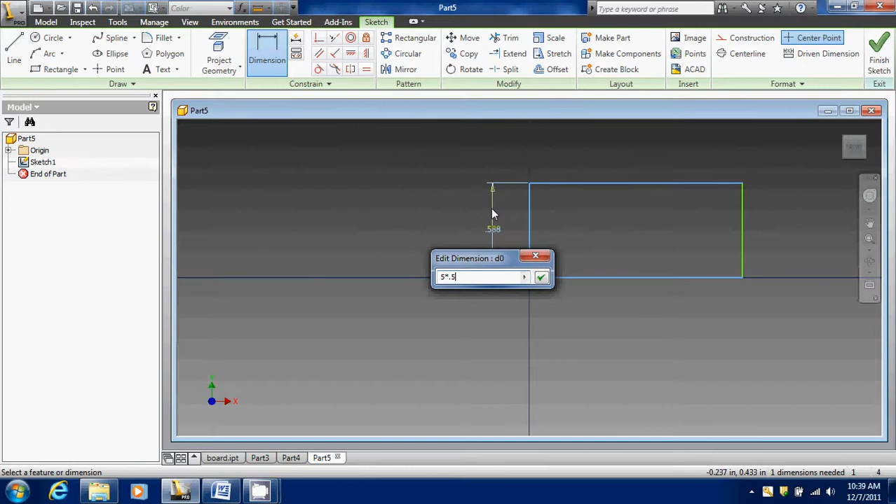New standard IPT, always. Rectangle. Dimension. Height of the rectangle is going to be 5 units, which would be, you could say, 5 times 0.5, and the width of the unit is going to be 8 times 0.5, or 4 inches in this case.

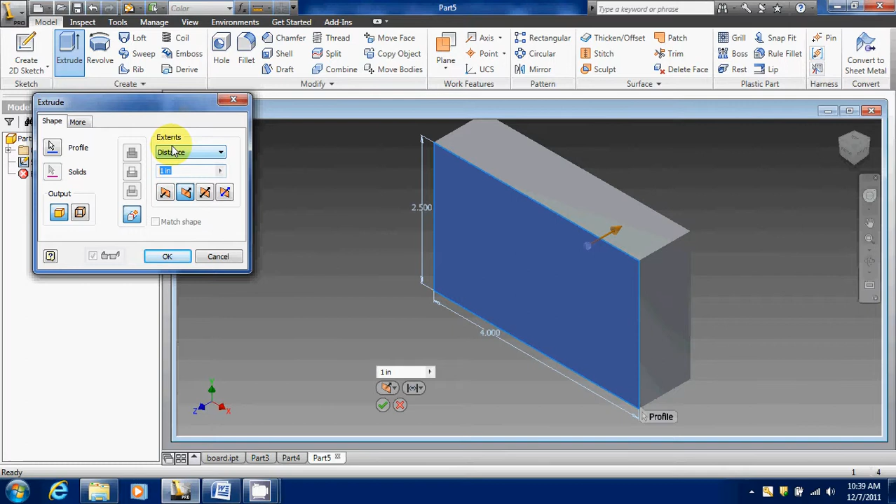Go to the home view, finish sketch, extrude, back. It is 4 units, so that would make it 2 inches deep. And there's our block. First thing we're going to do is create a sketch on the front face. Using line, lock onto a corner, come down anywhere we want, lock onto the other corner.

Looking at this, we can see that this point of this V meets right in the center, I believe. 1, 2, 3, 4 units right there. 1, 2, 3, 4 units right there. And it's 1 unit high. So let's go ahead and dimension that. The distance from this point to that line is going to be 2 inches.

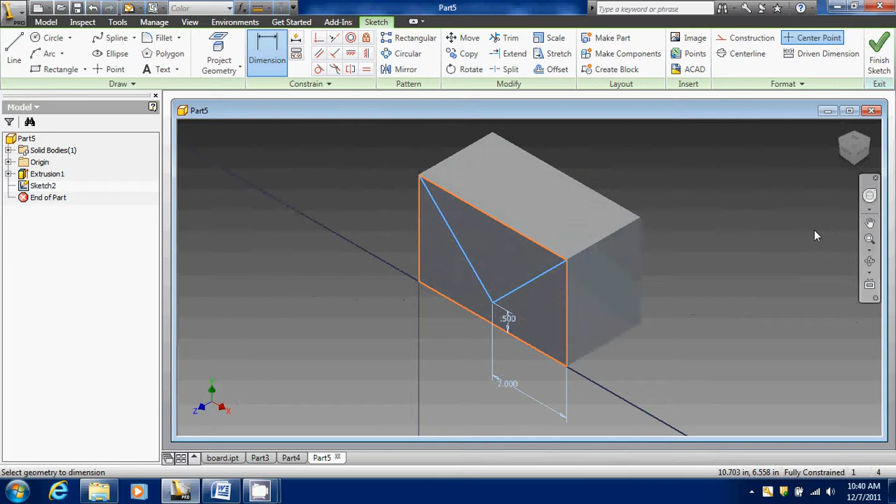And the height is going to be 0.5, or 1 unit. Let's throw that in the front view and make sure it looks centered. It looks good to me. Alright, we're going to finish that sketch. Now let's move around to the back side and do another sketch on there. I can even move right to back again for you guys to maybe see better.

And in this case, we're drawing another V, but notice it's not locked onto the corners. Let's take a look. This V in the back right here, each point is 2 units from the edge. And if we were to draw a faint line here on your paper, we would see 1, 2, 3, 4 units tall. Excuse me, 3 units tall.

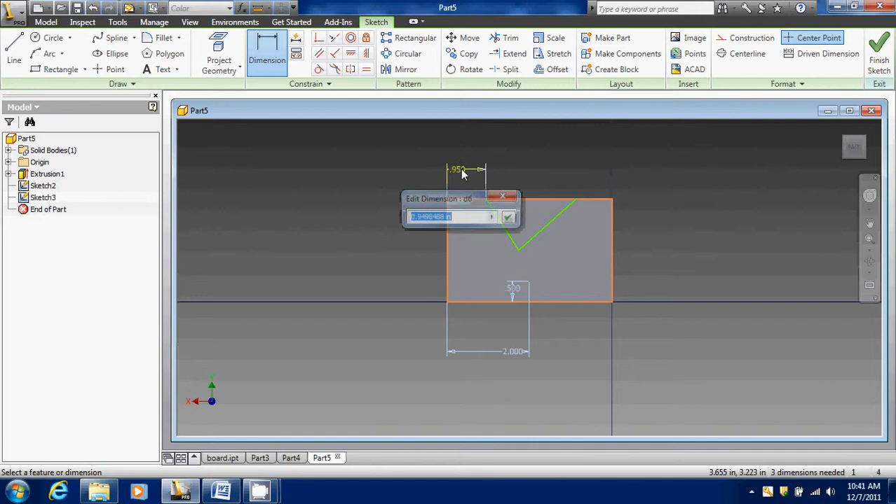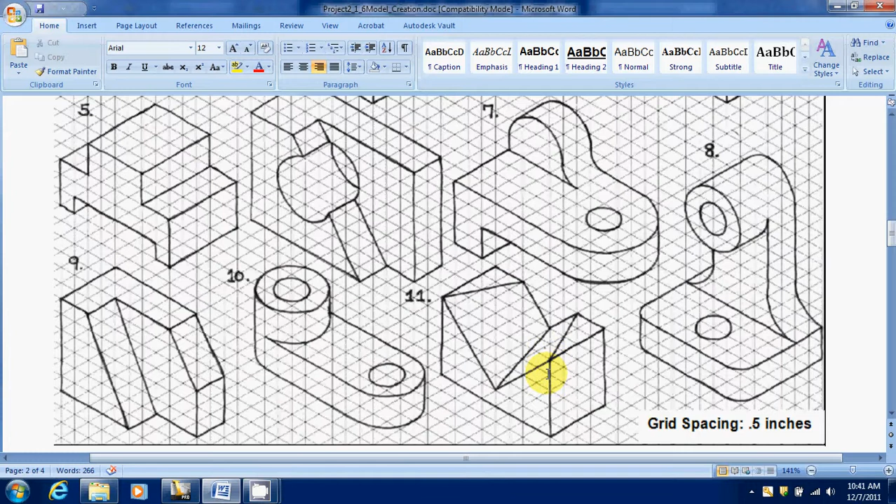So let's go back over here. Dimension. That'd be a 1. Same as that guy. Let's make sure that it's centered. 4, it is. So that makes it an even 2. And the height off the bottom is 1.5.

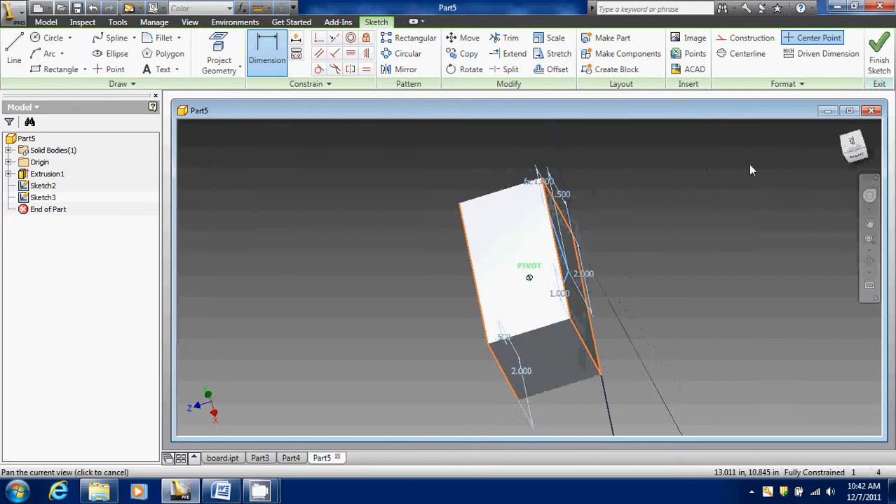Let's go back home. You can see we've got a sketch on the front, sketch on the back. Go ahead and finish your sketch, sorry. And we're going to use a tool called Loft. So with Loft, we're allowed to make an extrusion or a cut from 2 different sketches on the same object.

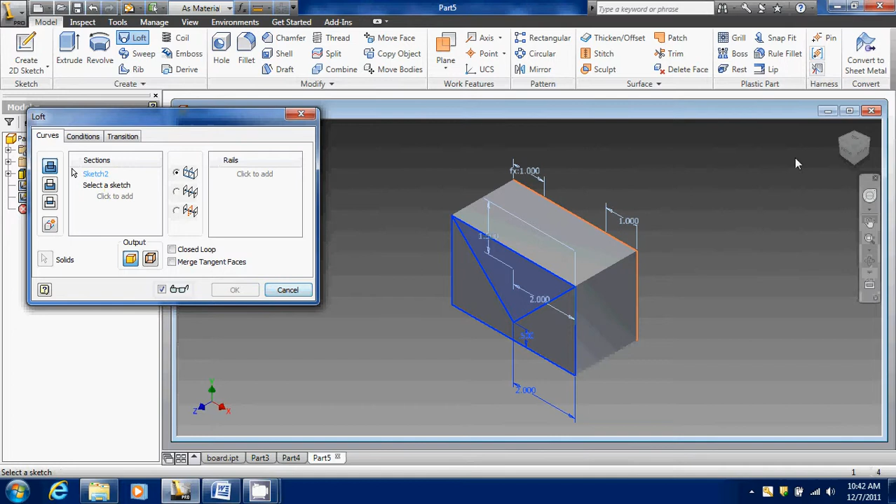First thing we're going to do, click to add a sketch. I'm going to highlight the whole sketch and then the section I'm using, which is this inside section. I'm going to add another sketch. Go to the back side, click once to make it all white, and then once there for the section I'm using. Go back home. You can see the 2 sections in blue are what we're dealing with.

I'm going to change from join to cut. Hit OK. Now you've just taken away that section. There was no other way to geometrically draw that shape but to draw sketches on the front and back and have a path cut for us called a loft for that to work.